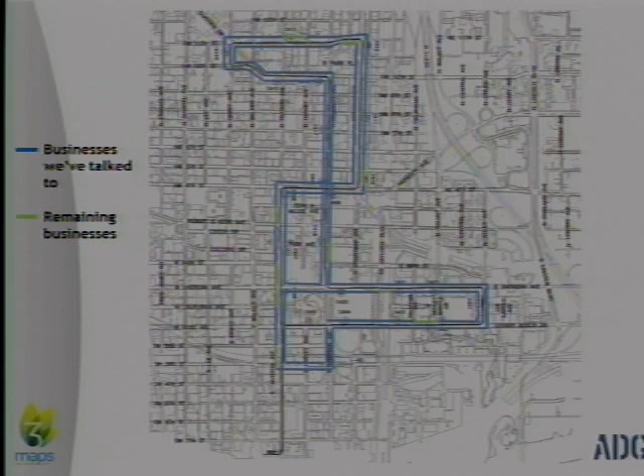And then this is an image of the streetcar route. And if you look at the blue portion of this, these are all of the businesses that either I've walked and talked to or that the consultant team and I have had individual meetings with. And then the green indicates the remaining businesses that I still need to meet with.

So overall, there are a whopping 474 business and property owners along the route. And as of today, I've talked to 289 business owners and 102 property owners.

And then, like I said, there are 49 events that will be taking place along the streetcar route that could have a potential for conflict. And as of today, I've talked to actually 45 of them. This says 44, but I've talked to more since then. Just, to let them know that they might need to change their route, but we're going to do our best to work with them during construction.

And then, do you want Lo or Jason? So Jason Cotton will be giving his portion, and he'll talk about how we've been working together as a team, so you can see how this all meshes together.

Do you all have any questions for me, though? Questions for Kristen? Thank you. Okay, you're welcome.

Good morning, everyone. This presentation is really brief, but it's just going to tell you a little bit about the utility and project coordination that we've been doing over the last several months and what that effort has entailed.

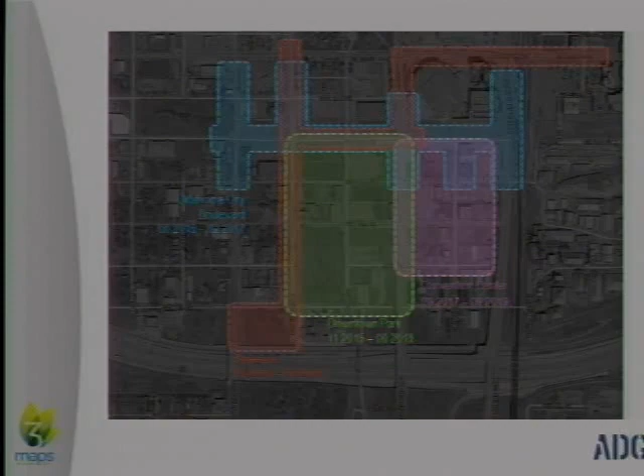As Mike and David mentioned, one of the complexities of the MAPS program is the fact that, in particular around the downtown park, there are a lot of projects that overlap one another geographically. We've got the streetcar, the downtown park, the convention center, all right next to each other, plus the Oklahoma City Boulevard. Now, while that would be hard enough in and of itself, we also have an issue with the project schedules of each of these projects overlapping, so with all the activities going on, it becomes a really complicated situation in terms of trying to sequence construction and get everything done.

So in order to try and address this, ADG has basically been assembling and compiling a construction schedule. For each one of these projects, we identify specific tasks. We develop this list by working with the MAPS office staff, as well as the various design teams involved in each project.

But the unique thing about this schedule is we've basically identified resources for each one of the tasks in the schedule. Those resources identify the specific location, either an existing public roadway intersection or a public roadway corridor between intersections. So each task is located that way, and each task also has a specific contract or project that it's associated with.

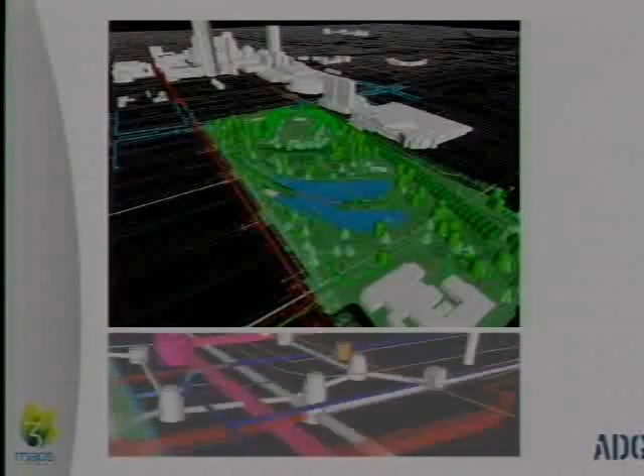Concurrent with that, we've also built a three-dimensional model of the projects, assimilated from a lot of existing City of Oklahoma City data. We've also been working with each of the design teams to incorporate any information they have in their designs. Obviously, projects closer to completion in design, we have more detailed information on. Projects just getting started in design, like the convention center, we use whatever preliminary information the design team can provide, and that's what we feed into this model.

The platform we're using is really robust. We can get all the way down - you can see in the image at the bottom of the slide, we can literally get down to specific pipes and conduits. So it's great for visualization, great for detailed analysis. It allows us to do, as you'll see on the right side of this slide, clash analysis, so we can look at utility projects and figure out if we've got conduits or pipes running into one another.

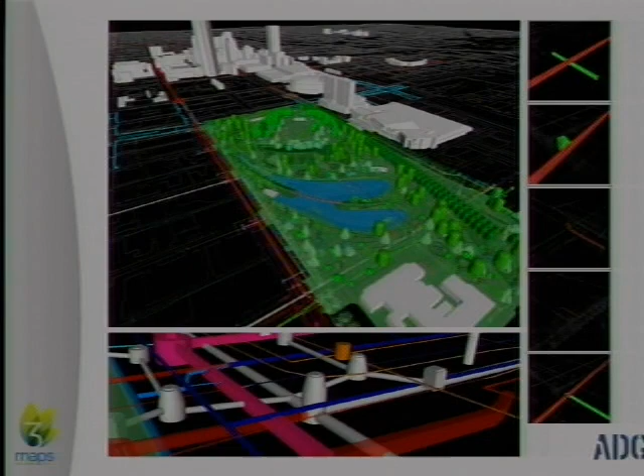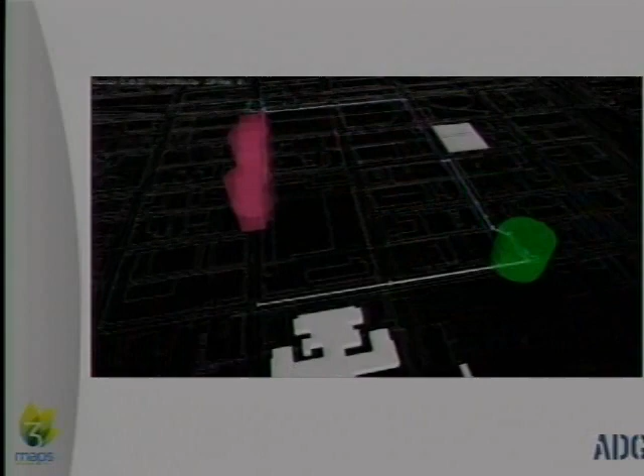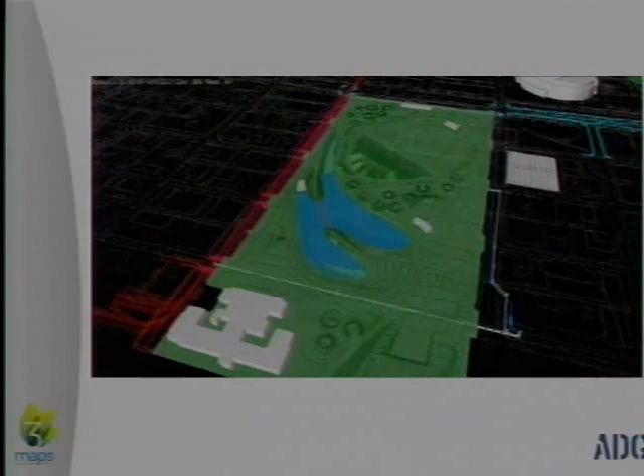But really the cool thing about this is once we put the schedule together with this three-dimensional model, we can basically animate the sequence of events as we understand them today. So in this animation, you'll see various cylinders and boxes popping up, signifying construction activities - OG&E and others, color-coded by project or type of activity. Those come on and go off depending on if it's demolition, where something in the model goes away, or construction, where something appears.

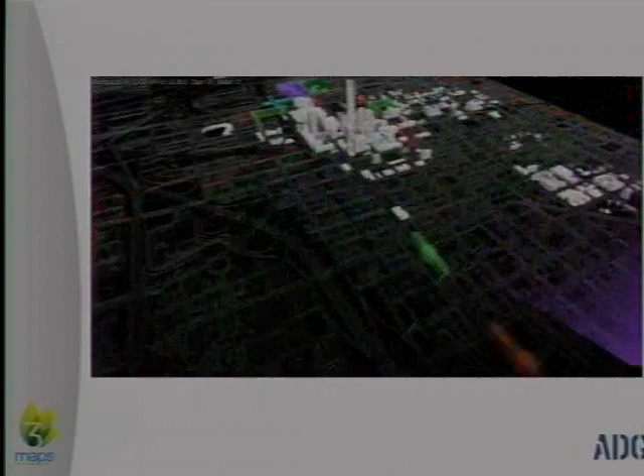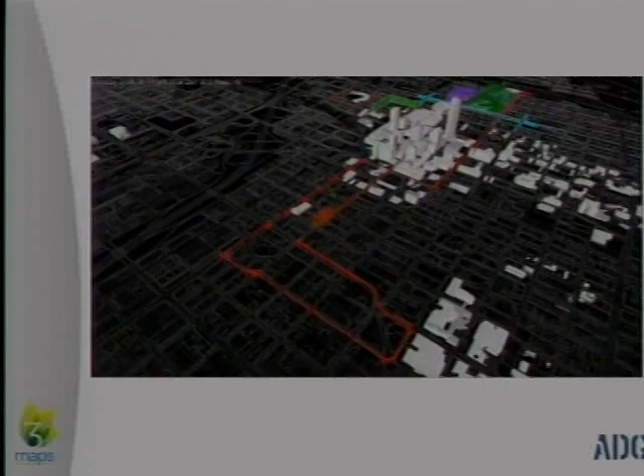So basically, we can show you not only how the MAPS projects are going to happen over time, but also one of the things that's really useful is we can turn to any specific date in the future and give the MAPS office staff an idea of the status of each project - things already built and finished, things on the way, or things in process.

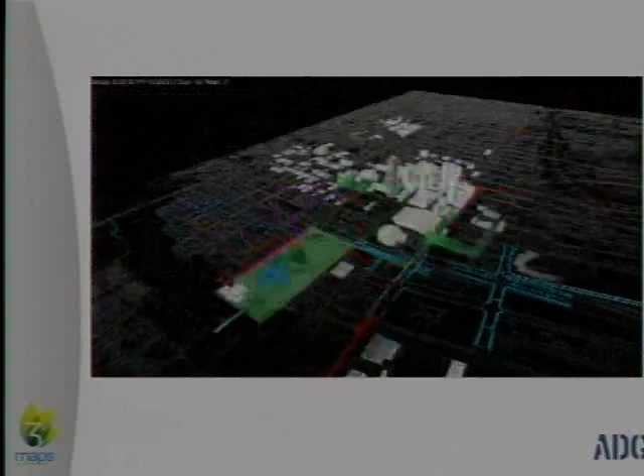So it's a really powerful tool. We've basically laid the foundation for this, and we're in a maintenance process right now. As new information comes in from one of the design teams, we feed that information into the model and continually improve it.

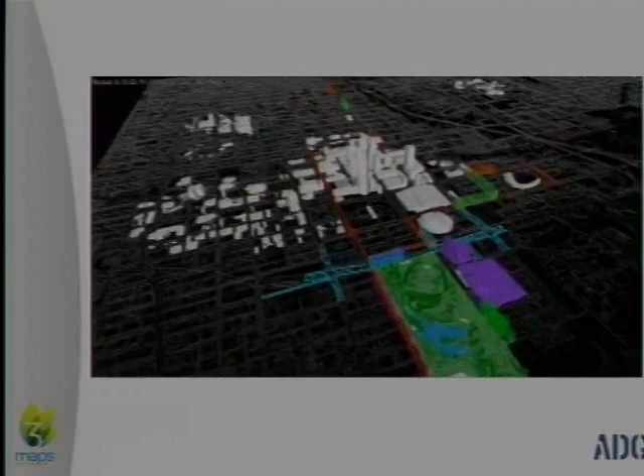Until a couple of weeks ago, the convention center was essentially just a box in this model. With the preliminary concepts that came from that design team, we took their SketchUp model and fed it into our model so we could reflect what's going on there.

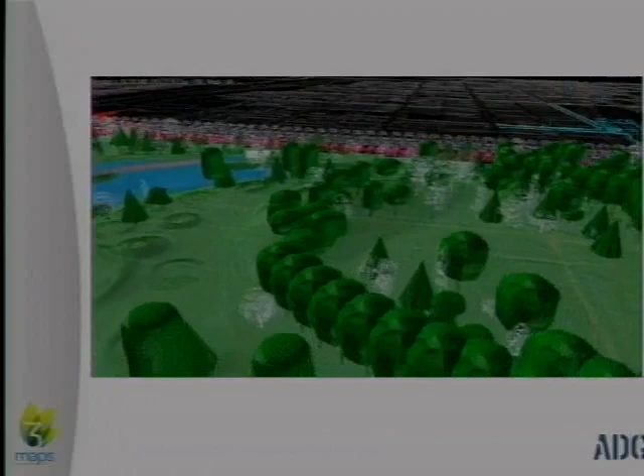I want to add a couple of things. First of all, it's really hard to overstate how complicated this project is. The animation you just saw runs for about 2 minutes and covers through the year 2021, and we can literally stop it at any hour of any day during that time frame to determine exactly what's going on anywhere in this entire area.

Lo has been spearheading this effort, and as I said yesterday in the streetcar subcommittee, the three people with me here today are an example of why I've never been afraid to hire people who are smarter than me, to make sure these kinds of issues get solved.

So you want to talk a little bit about what we've been doing? In managing the effort, I meet with all the different stakeholders, including from the front end all the different design teams—Hargreaves, Populous, MacArthur Associates, Jacobs—and help communicate with all those guys.

I meet with all the different city offices: Public Works, Traffic, Planning, and of course all the different MAPS teams. I also coordinate with all the communication and private and public facility guys—OG&E, ONG, and the communication companies like Cox, AT&T, the dozen or so of those guys.

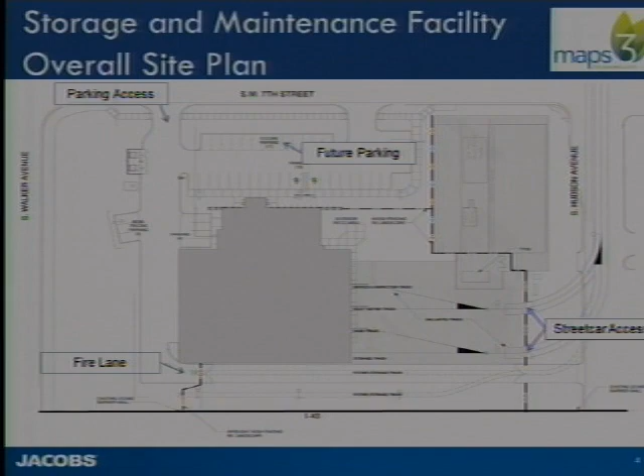So that worked out fantastic, and you can see where we've really worked with the entire site that we have and planned for future parking, future tracks, and any of the future possibilities that we might have for storage and such.

So the main building you can see up at the top of the screen is the administration functions of the project. That's where you have cubicle spaces, office spaces, the general manager's office, but we also incorporated a training room, which later in design we determined we didn't need as much lobby, so we increased the size of the training room.

Embark wants to make sure that they have enough space to be able to bring in police, fire facilities, and train those people in this facility to understand what the streetcar is and how it's going to operate.

So on the lower side, separated from the office functions, is the maintenance building. In the maintenance building, we have generous parts storage. We've taken lessons learned from other facilities constructed around the country, and the biggest complaint everybody had was not having enough storage for the parts and pieces for the streetcars.

So we've actually made this more generous than any of the other facilities around the country. We should have plenty, and it's expandable. There's room to add a 2nd floor if necessary.

You've got an area for service inspection that has a pit. You have the heavy maintenance area. Then you have the wash bay, which is an exterior area that can easily be enclosed in the future if you decide you need another heavy maintenance bay with future streetcars coming in.

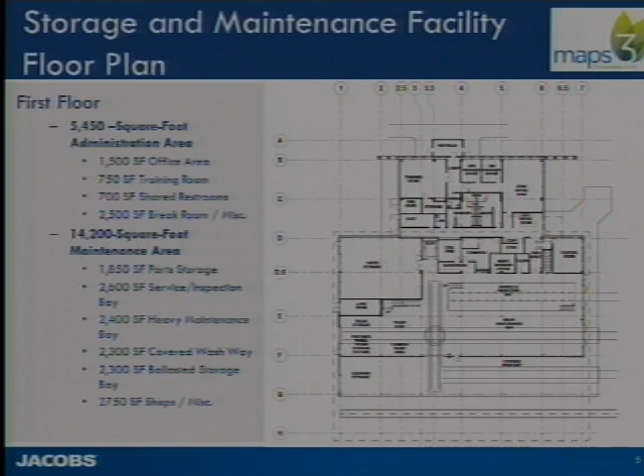And then our storage area, which is on the south side of the building. Right now we have it as a bid add, which I'll explain a little bit more in a moment. That will be a roof over 2 potential streetcar positions where they're undercover and stored out there.

We are also proposing to bring in a catenary line just in that location so those streetcars can charge while they're in the facility waiting to go out the next day. All the other positions, we do have the ability to charge the streetcars, but it's a ground plug, not on a catenary wire, which adds a lot of danger having live feed wires coming into the facility. We want to try and stay away from that, and that's a lesson learned from other facilities.

So on the 2nd floor, we've got an area where they're able to take apart the top of the vehicle. They can do all the work on the air conditioner units and the pantographs, and those work platforms allow, when the streetcar comes in, for that access.

When the streetcar comes in, it actually breaks 2 beams that release electronic locks on gates up there that allow the workers to come out and do the work on top of the vehicle. If the streetcar is not in position, you cannot access those platforms because there are no railings on the face. So when the streetcar comes in, it creates a floor all the way across, and it takes care of the safety issues.

And we've been working with the fire marshal on understanding what will be coming, and that we've taken that into account, and he's agreed that we won't be penalized when we're under construction.

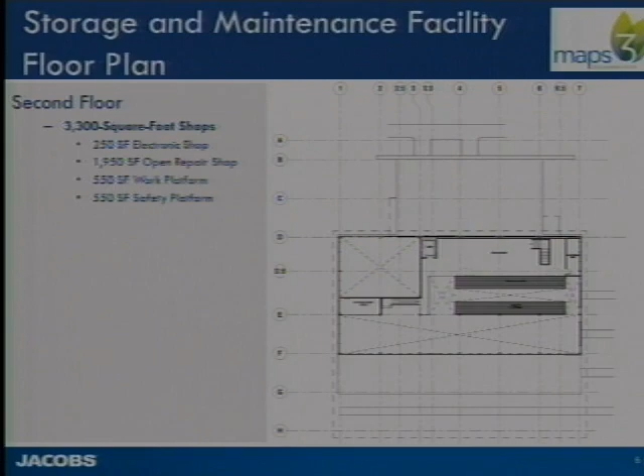And again, to the left side, right below the storage facility, we have a mezzanine area where we have potential for a future air conditioner unit. That way we're planning for what could be in the future, but it's not in there right now. We just wanted to make sure that if they desire that, we can accommodate it.

These are very similar to what Michael was talking about with their model, how they can look at what's coming and how the parts and pieces fit together. We do the same thing, using a very similar platform, building information modeling. We model everything in 3 dimensions, from our ductwork to our equipment that goes in the facility, and we're able to see if there's any conflicts.

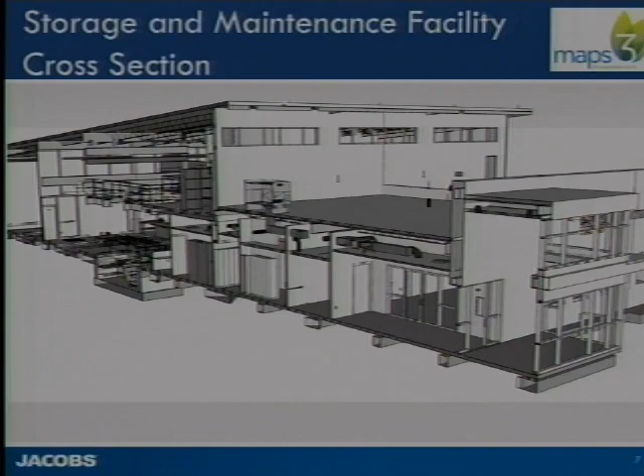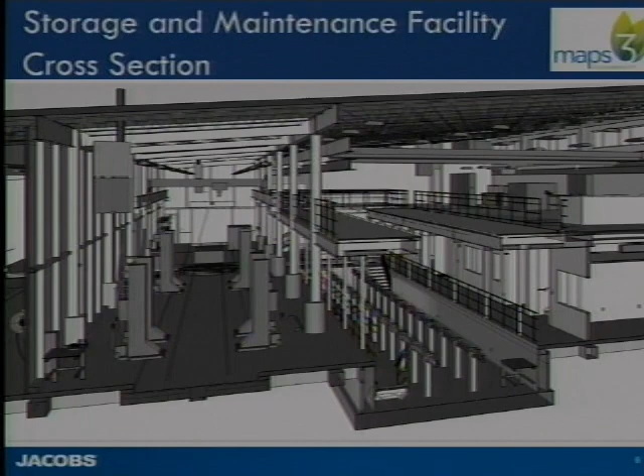So we solve all those issues before we even go to our 2-dimensional drawings and go out to construction. This is a great way of reducing the RFIs in the future. You can see on the section we have everything, including equipment, and identifying where that equipment will be, how it's stored, how it works, if there's any conflicts, and that goes from the bridge cranes to the building structure to plumbing piping. So we've done all of our due diligence, and our bid documents have incorporated everything that we have found that were potential conflicts, and we've solved all those issues early on.

As far as alternates, right now we have the building, the whole site and everything priced. We identified 3 alternates that may happen if the bids come in low enough. These would be bid adds to the project. In early presentations back in our programming, we actually had some pop-up roof structures that allowed southern light to come in. They're not integral, they're not necessary for the project. We wanted to make sure it's a nice touch to have some daylight coming in, but it's not 100% necessary. But we wanted to keep those.

We've taken the design enough that the contractor can price it, and if we can, we'll go ahead and include that in the bid. One item that we really do want to include in the bids, we're hoping our prices come in a little bit lower with the current construction pricing we've been seeing, is the storage track roof on the south side of the building. We're estimating that's going to be about $175,000, and we think that would definitely be something we would want to include. If it's not included, it is easily added in the future.

And as I mentioned, the HVAC system, the indirect direct air conditioner that we provided a space for, we provided all of the connections for, that's about $225,000. So if our bids come in low enough, we can start selecting one or 2 of these that we would like to add.

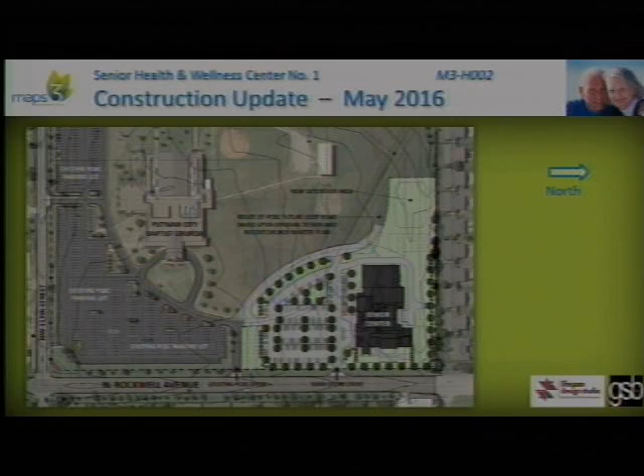This is a brief update on where we are in the construction process on Senior Center Number 1. If you've been up North Rockwell lately, you've likely seen the activity. This is a view of the site plan, which you've seen before. You can see the configuration of the building and its parking and drives, and the floor plan itself, which we visited before, and I can certainly return to if there are any questions.

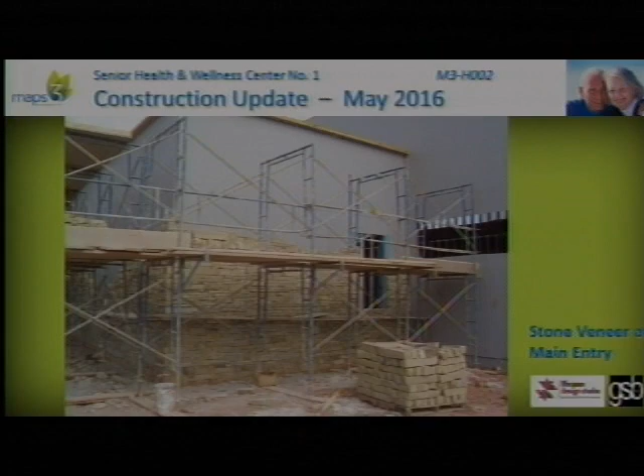Right now, the exterior of the building is working to get dried in as we get to the end of the rainy season. You can see brick veneer going up; it's pretty much completed around the building. Stone veneer at the entrance is being completed, and may be very close at this point to being done. Work on the roof is proceeding. You can see here some of the taller volumes, some of the roof curbs for roof-mounted equipment, and the roof decking, which is being prepared for the final roof surface.

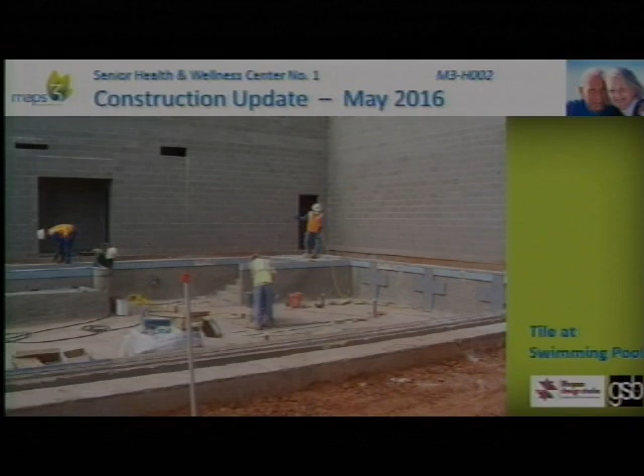You can also see work going on inside. The interior studs for the walls are being installed, and roof drain lines and other infrastructure in the interior spaces. So once we get the glazing in and enclose it, this will really pick up inside the building. You can also see the pool. We're beyond the bulk of the concrete work; now there's tile being installed, so the finished surface of the pool is proceeding. Of course, the pool is a centerpiece of this facility.

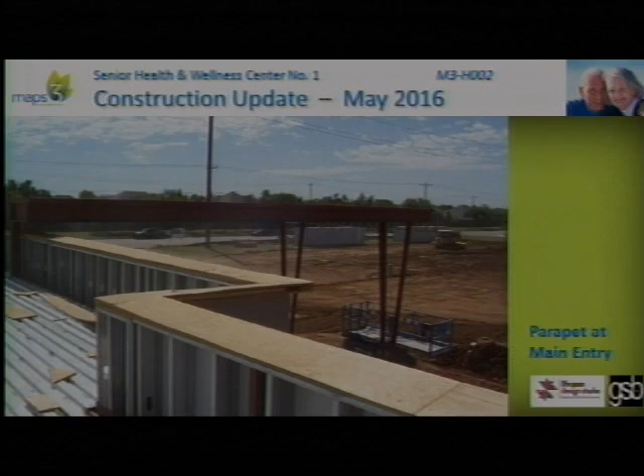Just a view of some of the exterior work on the roof and the wall connection, and also a view of the porte-cochere. You can see it as you look out over the finished grading proceeding in the parking lot. This is looking south. You can see the existing drive onto the property, and there'll be a second drive, just immediately left of this screen, onto Rockwell. So in the coming weeks, there'll be more of these activities proceeding and a lot more work occurring inside the building, especially as the exterior skin, windows, and doors are installed and the building is able to be fully enclosed.

This is a tennis-like game that's played indoors on a court, and it's exploding in popularity around the country. The operator has requested that additional striping be added to our basketball court, our sport court, and some equipment be purchased that will allow them to host those kinds of activities in the gym space. So pickleball is being included.

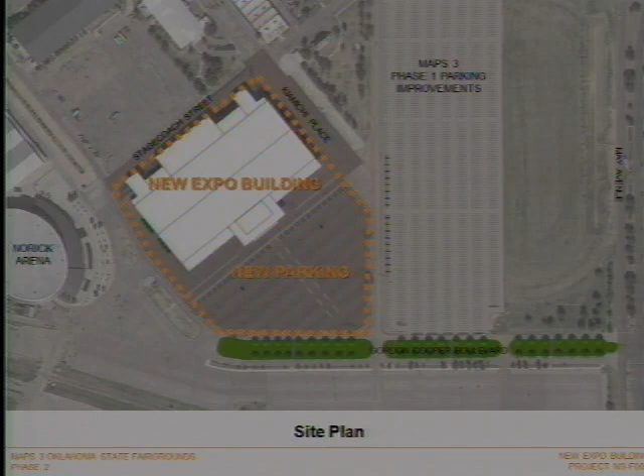As we can see the site plan of the new expo building in a graphic document here, we often use this to help us understand this slide, which represents our construction documents A, B, through G as it relates to the areas, due primarily to the size of the project, not necessarily its complexity.

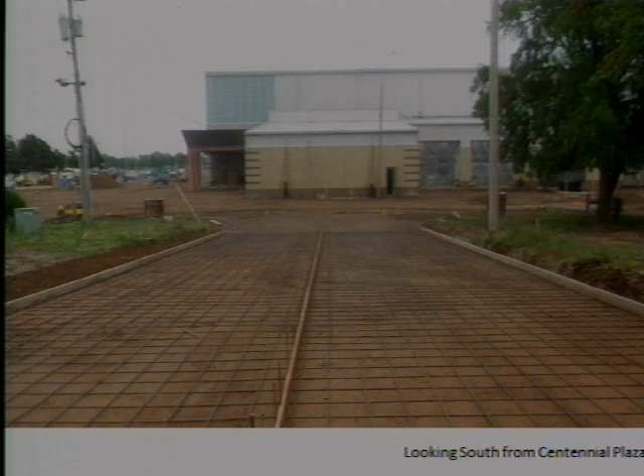This is a view looking south from Centennial Plaza. Yesterday we completed the east portion of this cast, so this has now been cast. We're scheduled to pour on Friday some of the area on the east side, near that compactor there. And then again, the aprons were cast earlier this morning at the main doors.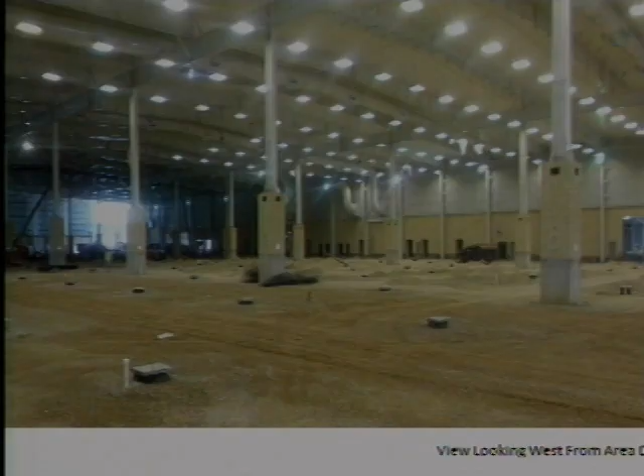This is a view looking to the west, standing from Area D with our back to that large overhead door on the east elevation. You can see that probably two-thirds, maybe a little more, of the final light fixtures are burning, so we have building permanent power. You can see some of the large ductwork that is about to finish, including painting at the west ends.

This is a view that we were just looking at, opposing the opposite direction to the east.

This is a view inside the kitchen. You can see to the right there some of the hoods that are hanging. Since this photo was taken about 10 days ago, we've since applied sheetrock to one side of the cold-formed metal framing partitions.

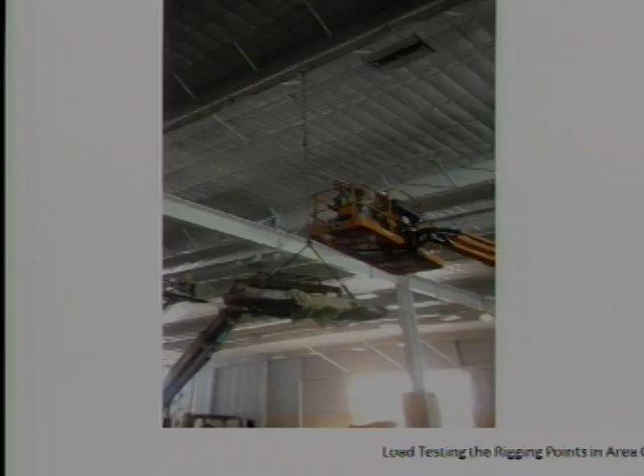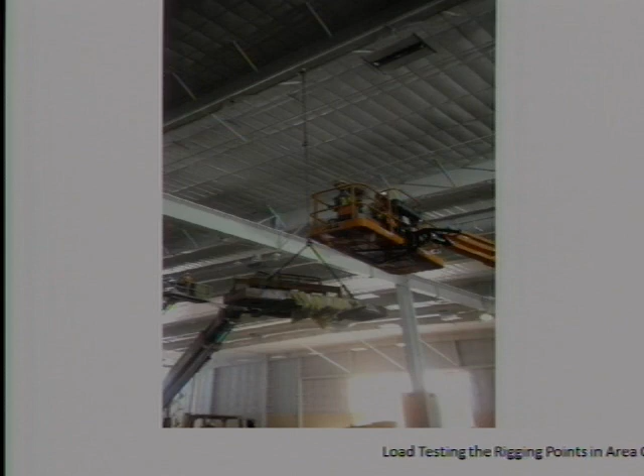Thought this would be an interesting view for many. We're doing our load testing from the rigging points on the rigid frames. There's approximately 7 per rigid frame, and this scope required in the contract documents took a total of about 10 contiguous days. What they're doing there is loading those hooks to confirm compliance with the documents as it relates to the ability for the expo to support loads as vendors may need.

Change order number 16 had 6 items. We had signage power from a previous change order request and approval. We had a signage package that was approved, and this is the power for that, including the low voltage interface. Mechanical fire dampers: on the north elevation we have 2 egress ways, and these are fire dampers that are required

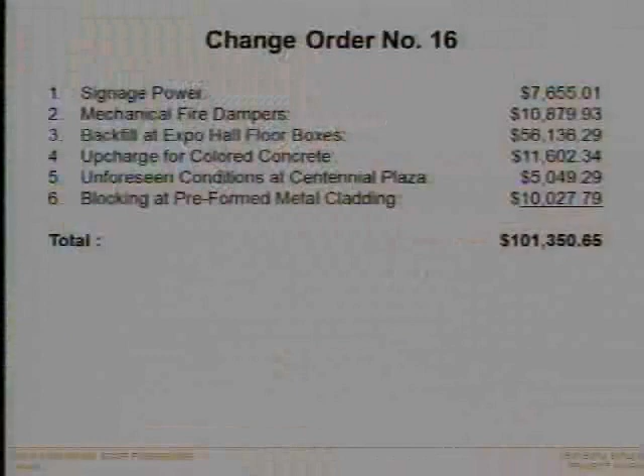to be compliant as we penetrate those rated separations. The backfill at the Expo Hall floor boxes, that's some updates to correct some backfill at those floor boxes we've seen in those photos previously.

There was an upcharge for the colored concrete. We had cast 3 different mock-ups, and through many opinions and approvals, it was confirmed that the third and final was the selection, so there was an upcharge for that color.

We had some unforeseen conditions at Centennial Plaza. When the demolition began, there was discovered an abandoned domestic water well, and then we had 2 sign footings that were probably 30 to 36 inches in diameter and about 7 feet long that had to be removed.

And then blocking at preformed metal panel cladding. On the face, on the south elevation of the building, we have a canted soffit, what we call a knife edge, and it has a striated pre-finished metal panel. That panel had a tendency, due to the striations or the weakening in the face of the metal, to have a cupping in it.

We went through several different discussions, including the manufacturer of the panel - the president met us on site. We had several discussions after that, and it seemed to us to be the most reasonable solution was to put a small block of expanded polystyrene, kind of like a styrofoam cup, in the ends of each of the panels, and that's what this involves, and it worked.

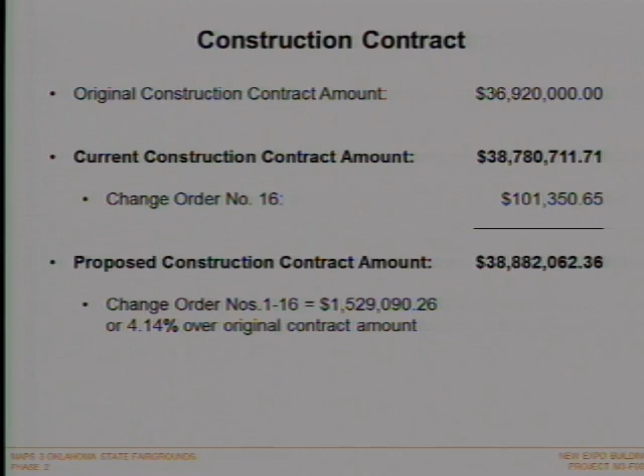Project schedule with change order 16 did not request any additional days.

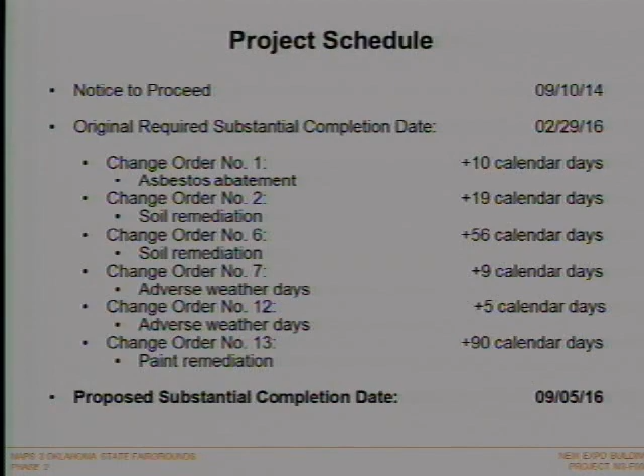Any questions? Questions?

Any update on the paint remediation? Is that all working well? Yes, sir. The paint remediation has completed through all sequences. We had a total of 7 sequences. It has been completed, and we're now just going back through and doing minor touch-up that will lead us into substantial completion, and there will probably even be some more after substantial completion due to just slight damage in completion of the project. For example, the loading on the load hooks caused some damage to the paint, which will have to be corrected, but it's going well.

Well, thank you, Wes, for the presentation. He has included in his presentation what is the next item on our agenda, which is item 11, and that is a resolution that we approve change order number 16 that he included in his presentation. Bob, we have a recommendation from the subcommittee. I have a recommendation from the subcommittee that it be approved.

Do you move that? I so move. Is there a second? It's been moved and seconded that we approve the resolution. Further discussion or questions? All in favor say aye. Aye. Opposed, no. That resolution for that proposed change order is approved.

The next one, I guess David was not included in Wes's presentation. You want to tell us about it? That's correct. Item 12 is a recommended resolution awarding and approving contract and bonds with McLean Holdings, LLC, DBA Vital Signs of Oklahoma, for the Maps 3 Oklahoma State Fairgrounds Expo Building signage, total bid plus unit price $17,000, project M3-F002C. The tabulation of bids shows McLean Holdings was at $17,000.